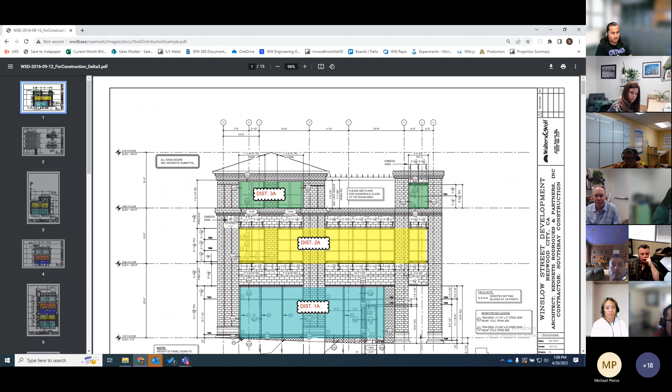But when you click here, we give you an example of what a field use distribution should look like. So when we say bring this to the meeting, you should be bringing something that looks like this to the meeting. And your field guys are putting this together. And the way we usually look at this is the ground floor should be a 1, the second floor should be a 2, the third floor should be a 3, then use your alpha characters to denote different areas of the building.

So if somebody gets a package on the job site, you'd want to know that something that says 3 goes on the 3rd floor, and something that says 4 goes on the 4th floor, without even having a sheet to look at. If we keep that consistent with all the packaging, it'll be nice for the field guys, because they'll see it the same every time it shows up.

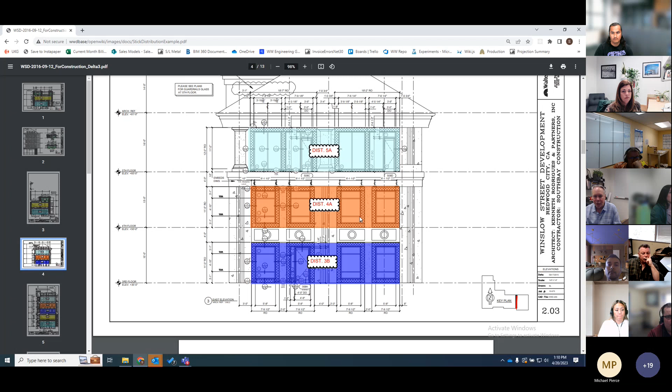But when you're doing distributions like this, you need to bring something like this, because if you don't, there's a lot of confusion that happens later and you won't get what you're thinking. And that's listed right on that page. So.

Hey, Steve, quick question on that distribution. Is it the foreman that's making that or the superintendent? And at what point do they do that? Tim? So I just recently did this for PIP, and I did it the week before. So that was new to me. I wasn't previously doing that, but I normally would get with them.

Like, just now I have a few coming up the next couple weeks for Dining Commons and for Project Nomar. But I have a JPS preliminary plan, and I get with the lead guy, and it's based off of that. So it's already somewhat done, and I'm just finalizing, spending an hour just doing this part.

Yeah, so I think here, Jerome, it's the super working with the guy who's going to be on the site, because the supers have the more consistent view of what all the jobs do. The guy on the job site needs to be involved because he's the one who's going to have to live with it, right? Okay, cool. Thanks. And to clarify timing, JJ, that should be brought to the pre-takeoff meeting. It should be done for this meeting. Okay, yeah, done before that meeting. Okay.

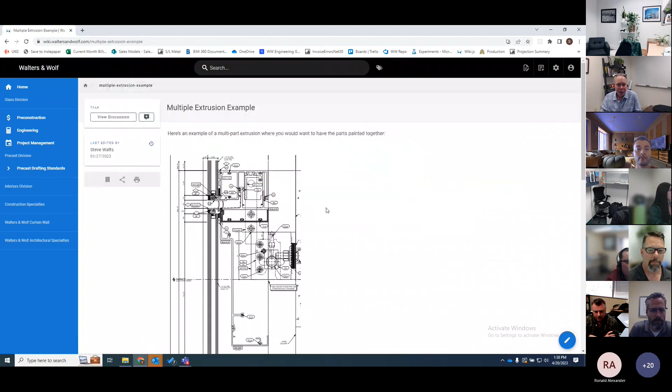Do we have any parts that will need to be assembled by the extruder prior to painting or shipping? So I made an example page because everybody gets confused on this one. So click on the link and I put some things together to show you what I'm talking about. So you see this shadow box in here? I've got this piece here and I've got this piece here. You want to paint those at the same time so that they come out with the same finish.

If you paint at different times of the day, different temperatures, different times of the week, these colors could vary slightly. And your customer won't be happy if the two parts that sit right together in one plane like this don't look right. So this is what I'm asking about. Do you have anything like this? Do you have something like this where there's a little piece here and a snap-on piece there, right?

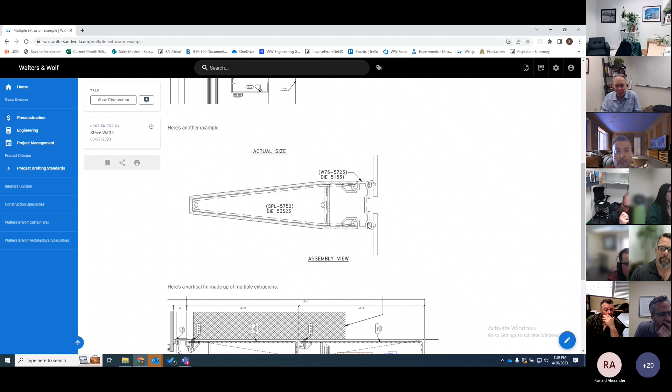Do you have something like this where I'm putting two sunshades together to form a vertical fin or a horizontal fin? These types of things are what I'm looking for, like flat surfaces that have to have the same finish, right? So that's what that question's about. I get that one a lot, but that's what this particular question's about, and I made an example page for you.

By default, all brake shapes, angles, channels have their exterior surfaces as an exposed area. So again, if you think about an angle that we're ordering, we're figuring you're painting it on the outside. But maybe you're using it on an inside corner and you're really seeing the inside of that angle. That's where you have to let Heather know, hey, this one's getting painted on the inside versus the outside. Otherwise, your finish might not be as complete on the inside of that part.

So if you're doing an Arcadia system, most people in this company that do what we do, like for Walters & Wolf systems, don't know that your shear block comes in a little baggie with the screws, right? It's already made. That kind of stuff isn't what most people are used to doing in our company because we make all our own shear block clips and all that kind of stuff. So we just need you to tell us what things you're buying as a completed part and what things we're ordering as a stock length.

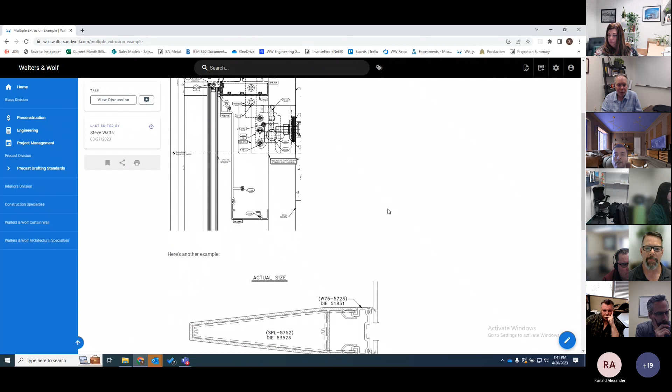Hey, Steve, backing up to that example you had, what the verbiage says is pre-assembled parts. I mean, Western's not going to assemble like in that shadow box type condition. They're not going to pre-assemble those, are they? It depends. They have in the past snapped the parts together and painted them as one. And then painted them? Oh. Yeah, we had it on Greg's job because he had something at Stanford like that and the parts didn't come out right. And so they literally assembled them and painted them at the same time.

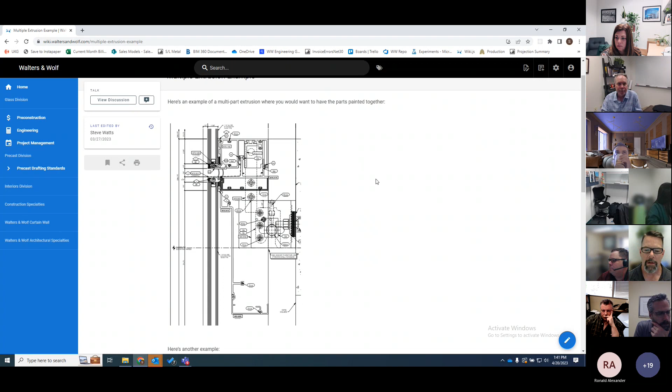Okay. But even if they don't pre-assemble them, at least they're going through the line at the same time of day and together, right? Okay. Yeah. All right. Kind of a vendor call on that one, but. Yeah. Okay.

Okay, stick wall stuff, when it comes up, splice sleeves, we typically anodize those so they'll slide together better. We need to identify the location of the splice and the anchor type. Splices should be above the floor because if they're below the floor, it's hard to hold those things up while you get the next one in place. If you have splices in vision, we want to talk about how we would finish that off. Trying not to have exposed fasteners or, you know, how we're going to caulk the splices. We had that on a few jobs where the customer wasn't happy with how that looked.

What's the floor deflection and will the horizontals accommodate this? Because again, on a stick wall with splices, we're moving up and down, and that means the horizontals are moving up and down on the glass. And sometimes people forget that we only have so much glass bite. So a 2.5 inch horizontal doesn't do much more than about 3/8 of an inch of deflection.

And then review all T-series transition sheets. Sometimes we get splices and things on there that don't show up, you know, anywhere else. So we just need to make sure that you've got all your small parts and pieces if there's transitions with extra pieces on it.

Sheetrock trim, I cleaned this up a lot because we've kind of gone away from what we used to do. So sheetrock trim will be supplied in stock lengths to the job site and be field cut. Sheetrock trim splice locations should follow the management decision tracker. And then just in the meeting, what stock length size are we using so the takeoff team knows what to do? And your field guy will typically tell you that.